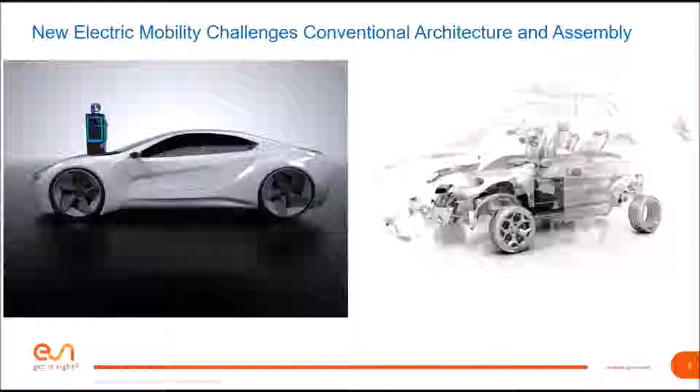And these many challenges are affecting the entire product development team, from the design and product engineering to the product integration to the manufacturing planning and the manufacturing as a whole. All these teams have to make the right choices in order to achieve their targets, whether it is finding the right balance between cost and range, or consumer appeal and styling, meeting regulations, delivering the right safety, comfort, ride quality, all the while ensuring on-time delivery, optimal performance, and manufacturability.

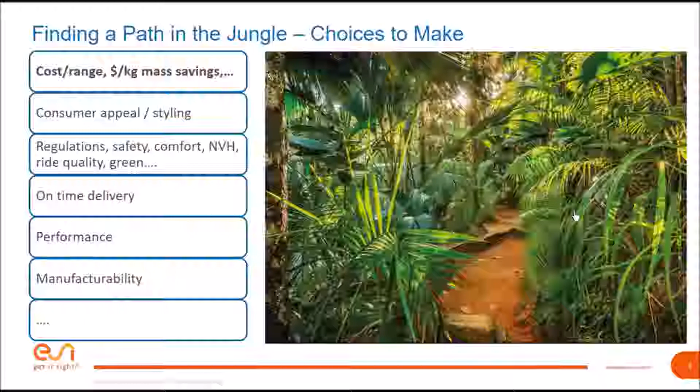This is why, through the engineering and manufacturing solutions that we'll be touching today, we will show you how to overcome these challenges and help you reach the required performance and range of fully electric and electrified vehicles. So whatever choices you make, digital tests and virtual prototyping are the key to achieve your targets. At ESI Group, we're leveraging over 40 years of domain and industry-specific expertise to help you achieve these goals. And we're doing this by replacing real tests by virtual tests and prototypes for product development, pre-certification, and for in-service performance, maintenance, and retirement. So I'll let you now get into the details of EV challenges with Caroline Burrow as she discusses the design and engineering challenges and solutions.

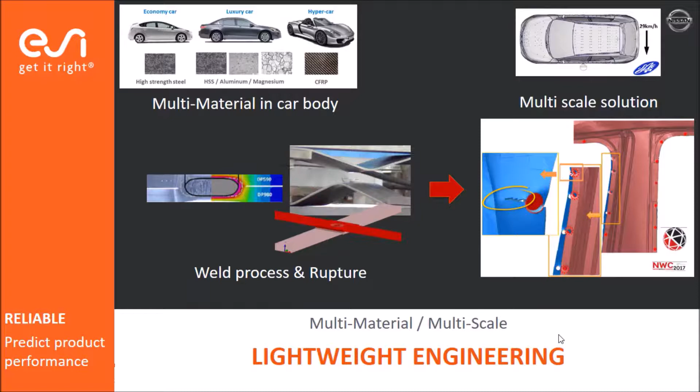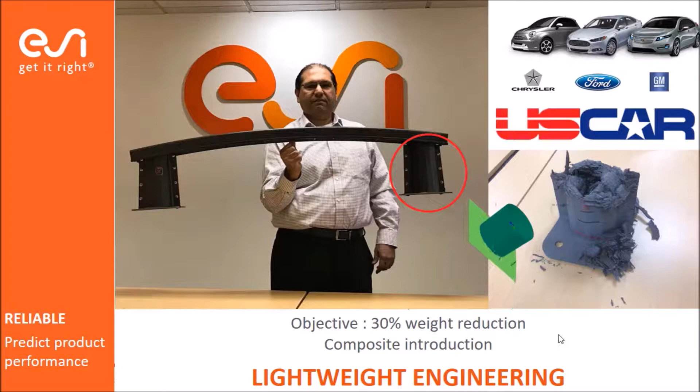Lightweight engineering often means the introduction of composite materials. Here is an example from a USCAR project involving Chrysler, Ford and GM, with the objective of 30% weight reduction by replacing a steel bumper with composite. Of course, you need to be able to match the performance of composite material too.

That means you need a fully reliable, accurate simulation of your product performance. The only way is to take into account how each component has been built, so to take into account the virtual manufacturing of each component within the assessment of your virtual performance of a car.

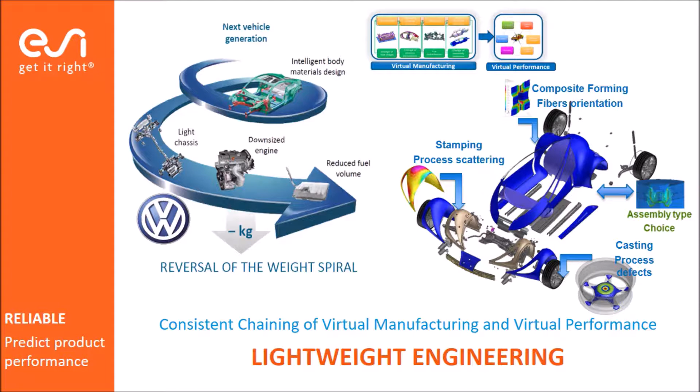Here you have a perfect example of virtual prototyping usage: the startup Gazelle Tech, recently created in 2014, proposing a fully new concept of car based on lightweight design with 10 chassis parts in composite instead of 300, and with a fully new concept of building this car.

They developed this innovation completely with virtual prototyping, without any real prototype, and they explain that each design iteration took them only 1 week instead of 5 months, and cost only 10 kilo euro instead of 1 million euro for a standard car. So this is a very good example of how virtual prototyping can support innovation and startups.

You have another example: a startup created in 2012, Expliseat, that developed and proposed a fully new aircraft economy class seat concept made in titanium. That made them, at that time, the lightest economy class seat.

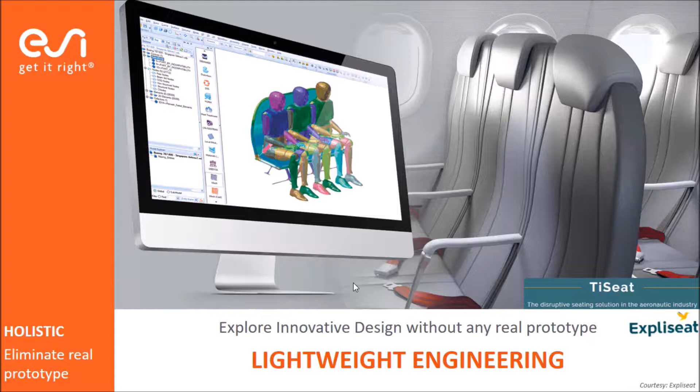Again, they explored their innovative design, their innovative idea, without any real prototype. Everything was done virtually, including the pre-certification of this seat.

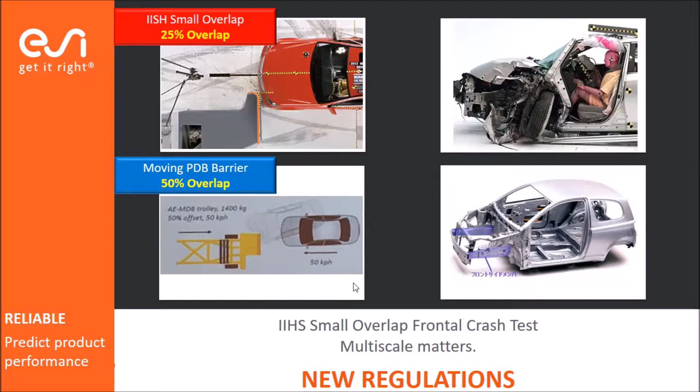Here is a perfect example of regulation changing and evolving, with new crash tests arriving that will impact electric cars in particular. So you need to make sure your virtual prototyping is reliable and able to predict such complex new regulations.

You also need to test your car in realistic operating conditions while still having reliable, predictable product performance. Here you have two examples: one regarding exterior wind noise that can be predicted, but also everything related to water.

Simulating water behavior, especially when a car is crossing water, is very important for electric cars, to check that there is no water intrusion into the battery compartment, and also to fully simulate the drivability and durability of your car in such realistic operating conditions.

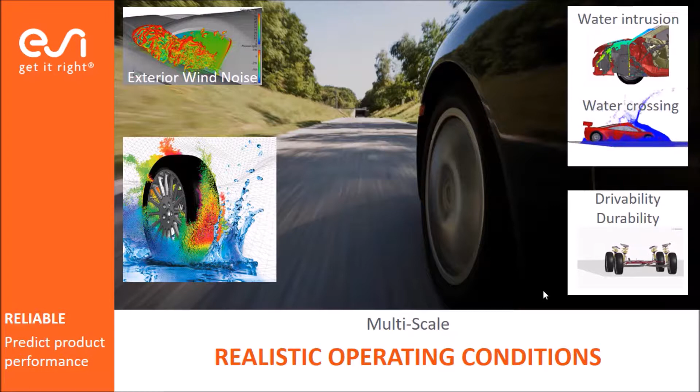Acoustic engineering is very important. I talked briefly about that for automotive cars, but for electric cars this is absolutely needed, because there is no more noise inside the car, so every small noise that was previously hidden by the powertrain or the engine can now be heard.

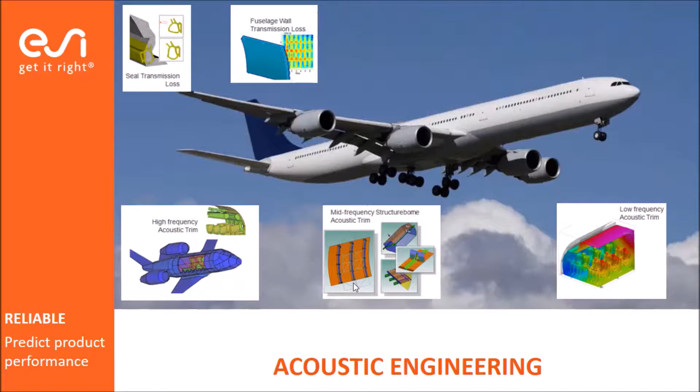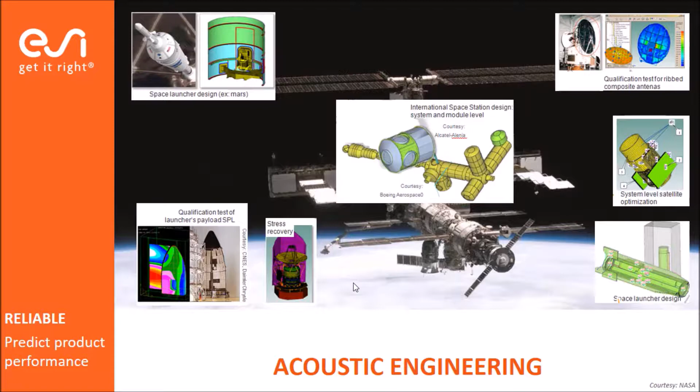So there is a lot of work to be done on interior noise, and also significant work on passive safety because of the absence of noise in electric cars. For the aircraft industry, this has been widely used for a long time for any type of frequency, and the same is true for the aerospace industry, which is fully proven and used.

One of the big challenges, as I mentioned at the beginning, is increasing driving range. One of the components that consumes a lot of energy is the cabin. Of course you can increase the battery size, but you can also better manage the energy consumption of the cabin without reducing comfort.

One specific topic is thermal comfort, which needs to be optimized regarding the energy consumption of the vehicle. One way is to correctly balance the HVAC system with the seat heating or seat ventilation system.

This is what we propose through a smart virtual prototype that links together a digital human model, a virtual prototype of the seat, and the virtual prototype of the cabin, combining the HVAC system, the seat behavior with heating and cooling, and human thermal comfort evaluation. Additionally, you can add systems to optimize all of this.

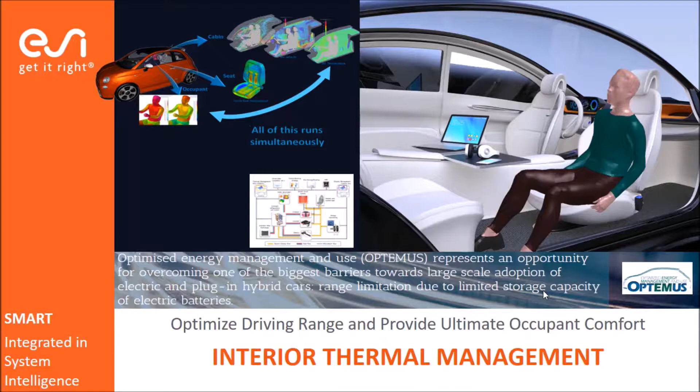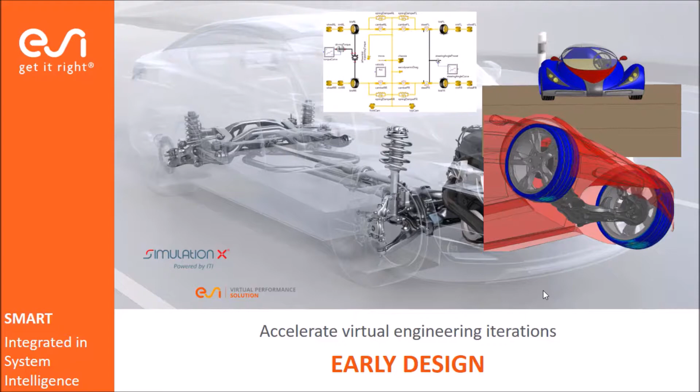Smart prototype is another example where you can combine 1D simulation through SimulationX with a 3D model to have something completely smart, managing the interaction between components plus reliable 3D modeling. At the very beginning of your development process, at model-based design stage, you can use open source software like Scilab to manage requirement complexity with model-based design.

We talked at the beginning about an efficient prototype. It's important to have a prototype covering all the application, enabling the right trade-off to break silos between teams, making sure that around one virtual prototype they will be able to test different applications and problematics, so the engineering team can take the right decision. This is explained by Honda, who are leveraging the capacity of a virtual performance solution, single core model on a full car for their latest vehicle platform development.

The consistent chaining of virtual manufacturing results and virtual performance, not only for crash and safety domains but also for NVH and durability, is a definite technological breakthrough.

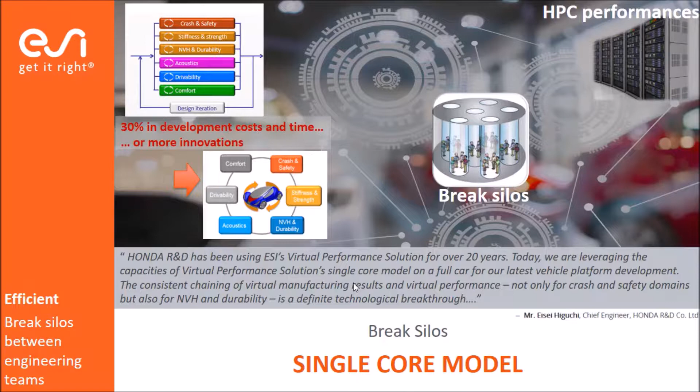Another example with Skoda, also investigating several options before design was frozen, thanks to a single core model - one model, one virtual prototype on which several types of tests can be performed virtually.

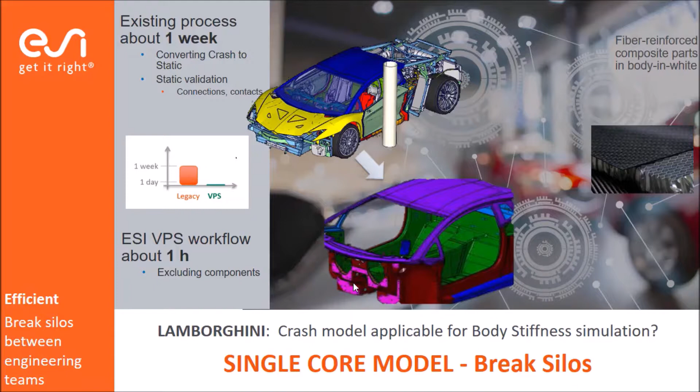Lamborghini explained that they could go from the crash model applicable for body stiffness simulation from 1 week to 1 hour. Audi, reusing the crash model for vibration, misuse, and thermal load cases, saved time from 1 month to 1 day.

So to conclude, what we propose is smart virtual prototypes enabling the necessary transformation of engineering processes through reliable, holistic, efficient and smart virtual prototypes, leading to better trade-off decisions before design is frozen, up to model-based system engineering.

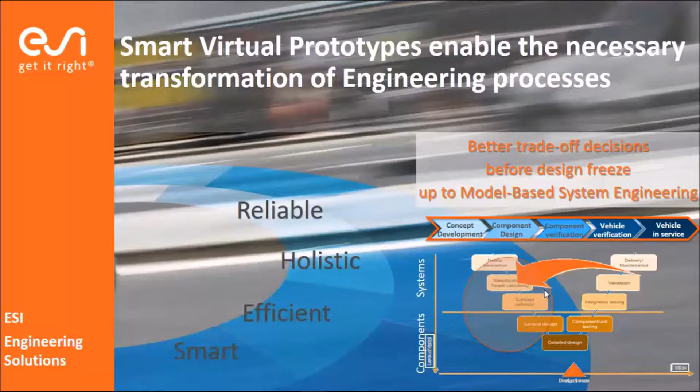This part of the talk focuses on manufacturing high-quality and cost-efficient electrified vehicles with the best possible range. The body in white is one prominent object for the exercise to balance design targets and cost per range.

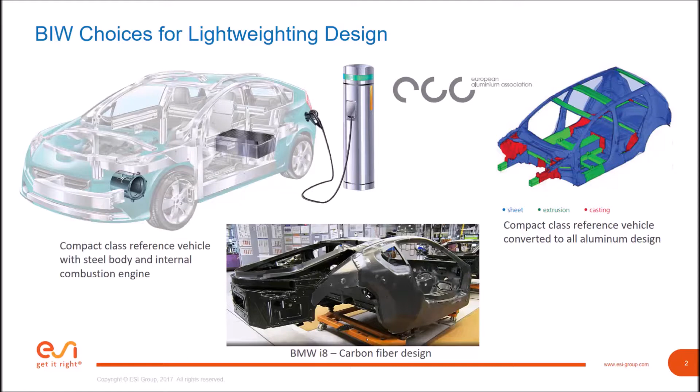With respect to cost per range or cost per miles per gallon and consequent choices of the price point, stamping of metals is the single most efficient choice for mass production of parts typical for a body in white structure. For a complete vehicle, chassis and exterior account for 35% of total material value. Estimated stamped component value is 1,100 euros per vehicle, following a study by Roland Berger.

In a body in white, three types of components can be distinguished. First, the components with the most end-user experience: exterior Class A panels and door enclosures. They decide on the perceived quality of the car and display the design intent. Class A surface quality is the main challenge for forming Class A panels and door enclosures.

Second, structural components which provide the best possible energy absorption. Third, structural components which provide the ultimate protection of the passenger, with a passenger cabin of highest possible strength. Forming to shape with limited elongation and compensating for springback are the main manufacturing challenges for structural parts.

Class A panels account for most of the cost when it comes to material and tool and die cost. The stamping of those large flimsy panels is particularly delicate since they behave almost like a foil, or as they say on the floor, like a wet noodle. Cracks are more difficult to predict. Next to cracks, surface defects that disturb perceived quality need to be detected virtually and eliminated.

Once the parts, doors and closures are done, the body in white is assembled. As an example, take the case of a Model S from Tesla.

First, the undercarriage is fabricated. A robot brings front, center, and rear floor panels to the frame. Then a team of robots welds the undercarriage with cold metal transfer welding. Next, a pair of robots installs the completed body sides. Last, a pair of headers is added, which completes the basic structure.

To summarize the processes used, the entire body design of the Tesla Model S is joined with cold metal transfer welding, spot welding, structural adhesives, and self-piercing rivets.

Cold and hot joining processes produce distortion due to gap closing, mechanical shrinkage effects of cold processes, and the heat effects of thermal processes. Distortion needs to be managed at every assembly step in order to assemble the body in white to specifications. Virtual management of distortion due to the distortion effects of joining processes has a great cost-saving potential because costs due to late engineering changes can be avoided.

Sometimes it's even not possible to compensate at the assembly level, and compensation needs to be done at the stamping tool level. If in such case too late discovered, it can result in catastrophic unplanned costs and delays that need to be avoided under all circumstances.

So how to achieve manufacturability, shape accuracy, and operational excellence? A one-stop job shop from ESI helps you decide where to put joints and clamps, and to control and optimize clamping conditions, welding process parameters, joining sequence, and pre-deformation of parts.

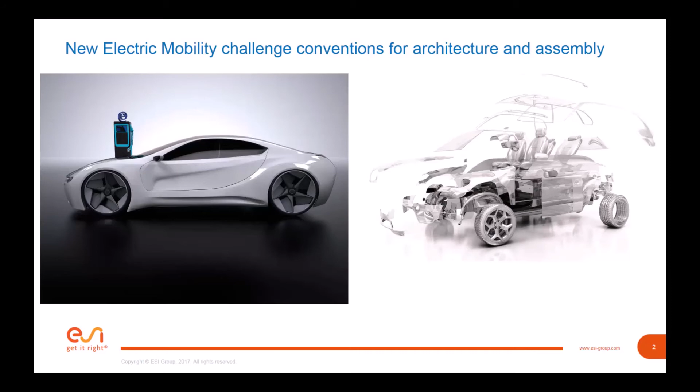Putting batteries instead of certain frame elements, putting electric engines and motors closer to the point of power distribution so that we don't have a transmission centrally located, but instead hub motors at each one of the individual wheels will certainly change the way we have to think about how we assemble and how we produce these vehicles, as well as how we service and support them.

By using virtual reality, we can actually experience what it's like to try to assemble and to service these new vehicles. And that's going to mean that we'll have to be able to, in VR, reach in, grab, and assemble and disassemble those vehicle components.

And by doing it in VR, we're replicating the experience that we would normally only receive once we're building a practical physical prototype of that vehicle.

As we've stated before, using virtual reality or virtual prototyping allows people to reduce the reliance and the requirements for physical and practical prototypes. However, without losing that experience of what it's like to build, assemble, and service those modern vehicles, we have to regain that opportunity for experiencing what it's like to build these cars.

And virtual reality, powered by ICIDO, is going to allow us to experience, from the first person point of view, putting those vehicles together.

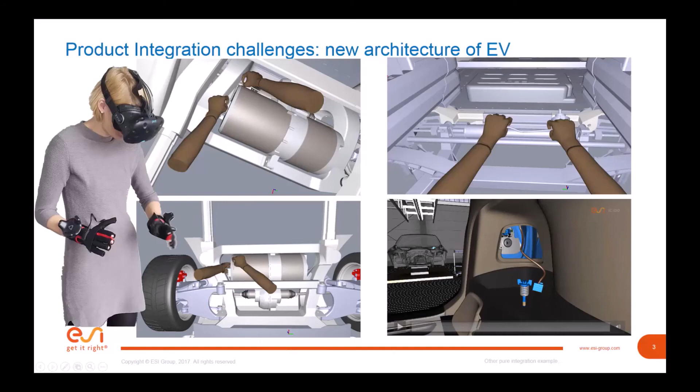Additionally, we have the capability to transfer my first person experiences that I might have in virtual reality to a third person analytic body, such as taking the behaviors and the motions that I used in assembling a prototype vehicle in a virtual assembly line.

I can also map that behavior to other sizes and other populations of human operators who might be tasked with the requirement of assembling these cars in the factories of the future.

This way, I can gain all of the experience that normally only comes from piloting a prototype vehicle by doing a virtual prototype. And that's going to enable us to address all of those human-centric product design as well as assembly process and service process issues that normally would not be recognized until the vehicle was in full production.